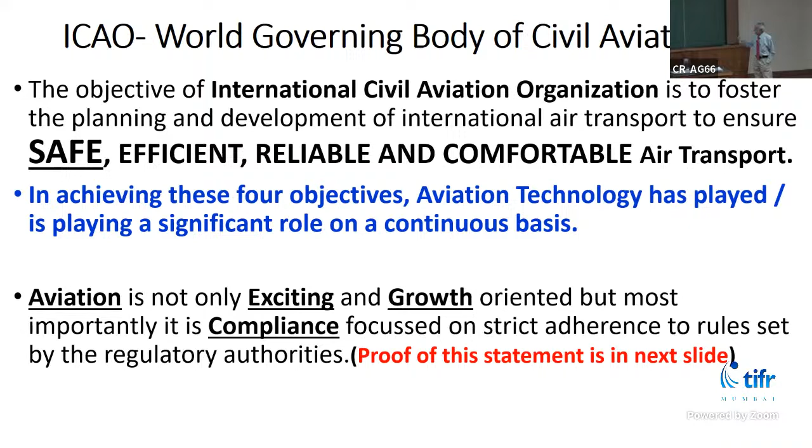When I say aviation is exciting, it is the art or science of flying aircraft, the design, production, and maintenance. For me, aviation means, as I told you, E-C-G.

If you put A as 1, Z as 26, V as 22, I as 9 - if you add aviation, it comes to 91. If you code G as 7, W as 23, growth comes to 91. Thirdly, compliance: C is 3, O is 15, M is 13, you add it, it comes to 91. Therefore I have proved that aviation revolves around these three characteristics, which nobody can deny. I am not a scientist, but I proved it.

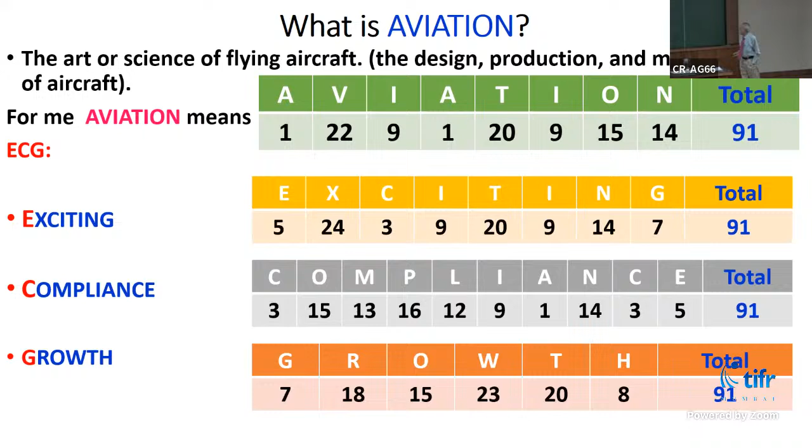Now I will prove practically how this is exciting. The first flight which J.R.D. Tata flew was a Puss Moth aircraft, single engine, registration VT-ADN, from Karachi to Bombay. It landed at Juhu airstrip, carrying hardly 3 passengers, weighing 930 kilograms. This flight took 7 hours from Karachi to Bombay, with two stopovers, one at Ahmedabad and second at Surat.

This flight was refueled by bullock carts at the Ahmedabad airport - two bullock carts by Burma Shell carried the fuel and filled the petrol for this flight. In March 1948, Air India introduced a Lockheed Constellation L-749A.

Its range is about 4,200 kilometers, it carries 51 to 81 passengers, and the takeoff weight is 47,000 kilograms. From 930 kilograms you have come to 47,000.

Then in the 1970s, the 747-200 was introduced, which carries about 400 passengers, and non-stop it can cover 9,500 kilometers, with a max takeoff weight of 350,000 kilograms.

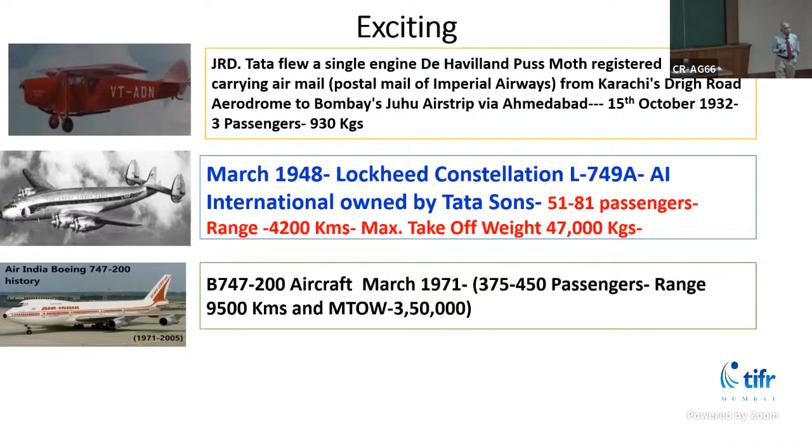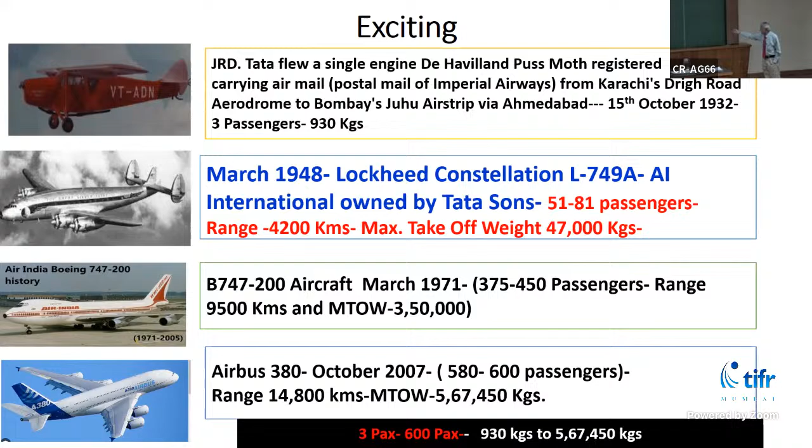The latest Airbus 380, which is supposed to carry the most passengers, 600 passengers, has a max takeoff weight of 567,450 kilograms. This is the exciting growth from 3 passengers to 600 passengers, and today non-stop flights are going on.

This is the first flight cockpit, VT ADN. The same aircraft flew again after the 50th Golden Jubilee, when J.R.D. Tata flew Karachi to Bombay.

Today, the world is looking for this flight, where you will be able to see 2 sunrises. Qantas is going to operate ultra-long flights, with a launch date of mid-2026. This will be the Airbus A350-1000, which can fly 19 to 22 hours non-stop.

That is because of the technology. The technology guarantees fuel efficiency and also safety for operating this flight. If the fuel efficiency is down, the cost of operating is very, very high.

Today, in the airline industry, more than 33% of the cost is fuel. Therefore, if the fuel is not efficiently planned, the cost effectiveness will be very high and no passenger will be able to afford a flight. That's why Concorde died completely, because the cost of Concorde operation is 4 times more than normal jet operation.

Civil aviation is totally regulated compared to road transport. Today on the road, at least 25% of people do not have a driving license, but they will drive. There is no rule. People go in opposite directions, don't wear helmets, and a scooter meant for 2 people will carry 5.

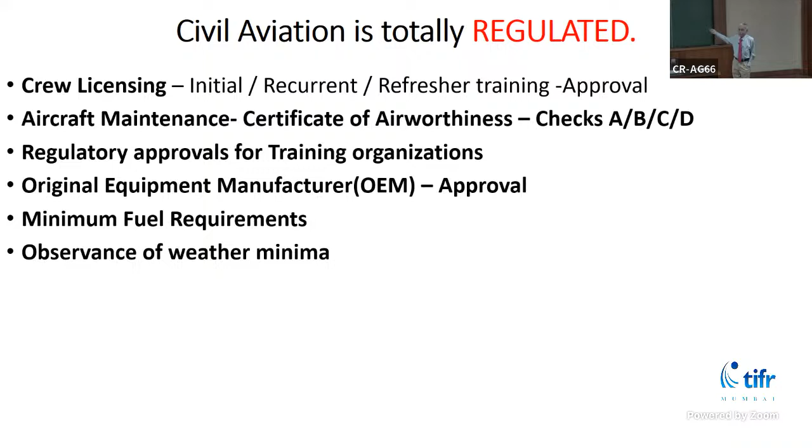Then, what is the minimum fuel that has to be carried on a flight? What are the minima? Supposing a pilot is coming to land, if he is not qualified to do category 2 operation in Delhi, and the weather is below 500 feet with visibility below 500 meters, he cannot land. He has to go on because he has not trained for category 2, which I will explain later. Operations manuals have to be written before a flight starts.

You must have a maintenance manual. These are all the requirements of the regulation. Why I am telling you this is that the entire airport has to be certified, whether it is following international regulations for runway length, stopway, clearway, everything. Because of this, civil aviation is totally regulated and you're enjoying the safety record.

Maintenance check: every aircraft has to undergo an A check, which is every 400 to 600 hours. Did any lorry or bus or taxi undergo a check? It goes on till it grounds on its own. No check. I have seen in India, there is no, what is it...

Glass panel, like a panel, on the right side and left side. People will drive without the glass panel because you don't require a gear. All you require in India is a brake and an accelerator.

In Muscat, when I went for my Muscat license test, I failed on the first day. Why? The road inspector sat in my car and while sitting there, he put the window in closed mode. I started driving and went up to a point, but he failed me because I did not check whether the glass was open or not. That is the level of rigidity expected.

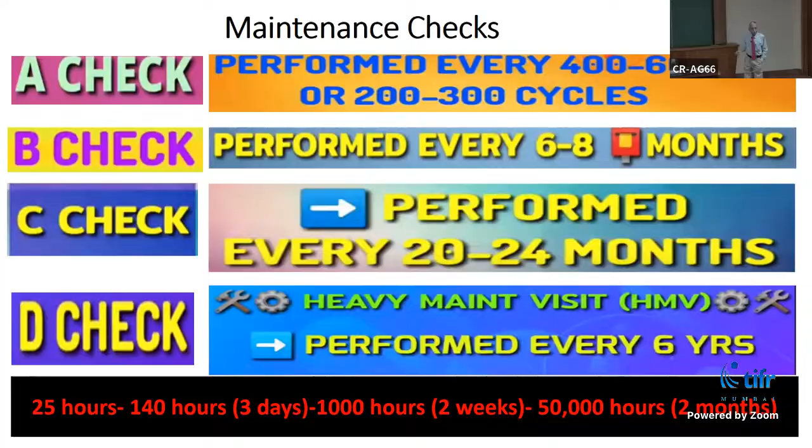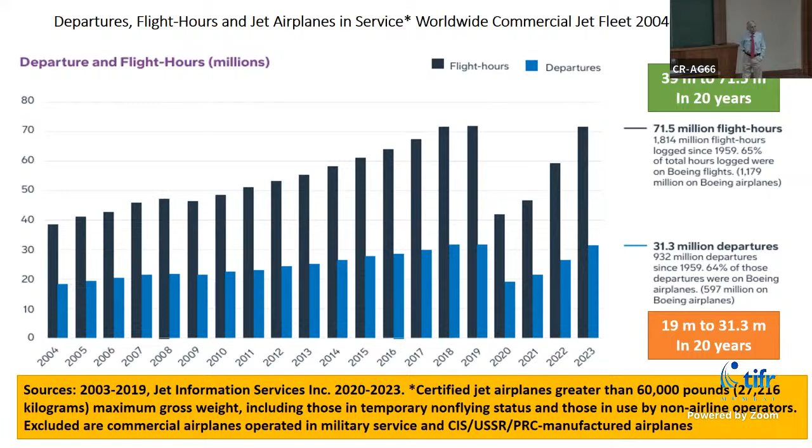This is the growth of civil aviation. Over the last 20 years, flight hours have grown from 39 to 71.5 million, and departures to 31.3 million. If you see 39 million to 71 million, that's almost doubled in 20 years. Similarly, departures grew from 19 million to 31 million - civil aviation is continuously growing. In India, passenger growth went from 103 million to 220 million, almost doubled in 10 years. Airports grew from 74 to 157, almost 3 times, and India is projected to have 350 to 400 airports by 2047.

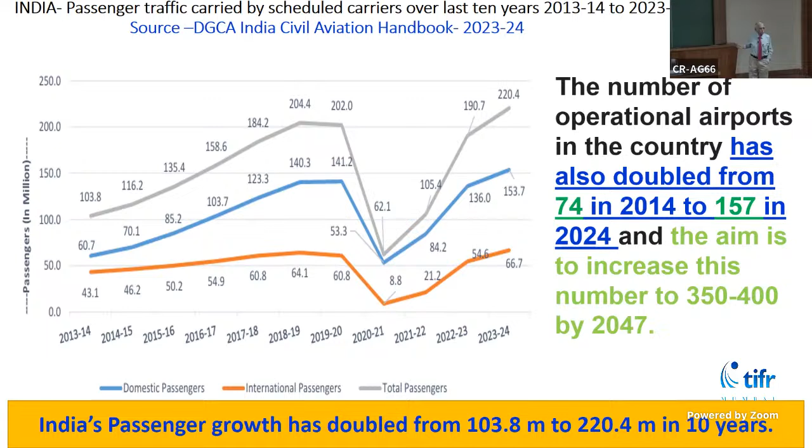Now we are going to see how technology contributed to the 4 objectives of ICAO: safety, efficiency, reliability, and passenger comfort.

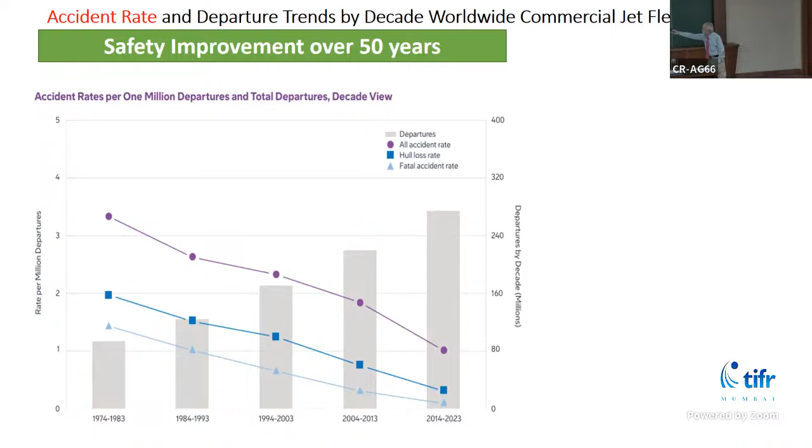Now, taking safety improvements first, if you look at 1974 to 1983, you had almost 3.5 accidents per million departures. It has come down to almost 1. That is the total accident rate.

That is the all accident rate. Next is hull loss - if an aircraft meets with an accident and cannot be repaired, it is completely damaged, a total loss, that is called hull loss. The third curve is fatal accidents. Accident rate has reduced by 45%, hull loss by 58%, and fatal accidents by 68%, even though departures increased by 25%. All accident rates have declined over about 50 years, primarily due to technology.

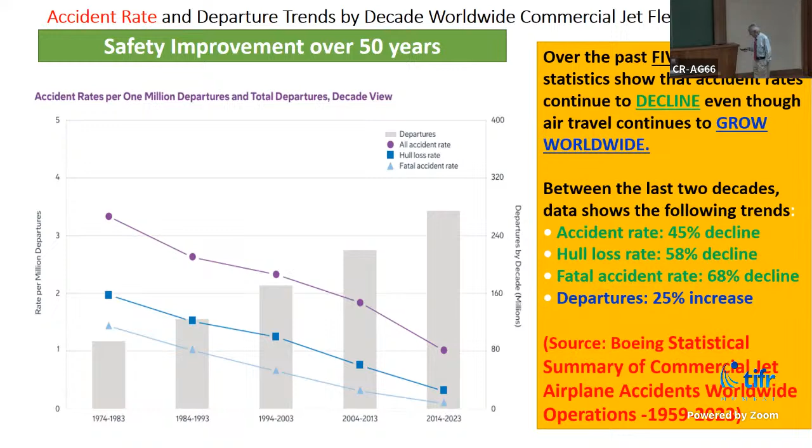This is one example: 40% of the most fatal accidents happen in just 2% of flight time - takeoff and landing are the most critical phases. Therefore, technology has been applied more importantly to prevent landing accidents, like runway excursion and loss of flight control systems, all focused on eliminating or reducing landing accidents as much as possible.

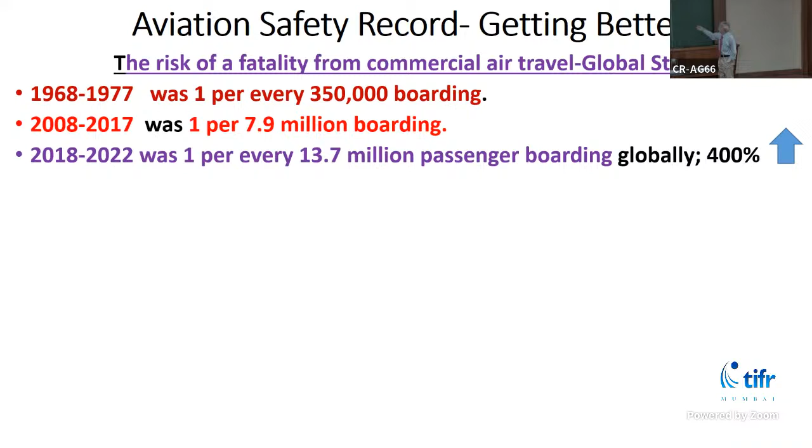In 1968 to 1977, one passenger died out of every 350,000 boardings. In 2008, it was 1 per 7.9 million. That is the safety record. In 2018 to 2022, only 1 death per 13.7 million passengers traveling. Today in Bombay, on the roads, you see 20 deaths every day in each district across India. From 2018 to 2022, with 13.7 million passenger boardings, a 400% increase, the chance of dying during an air journey keeps dropping by about 7% annually, continuing to go down by a factor of 2 every decade - about 2% reduction in accident rate, primarily attributable to technology.

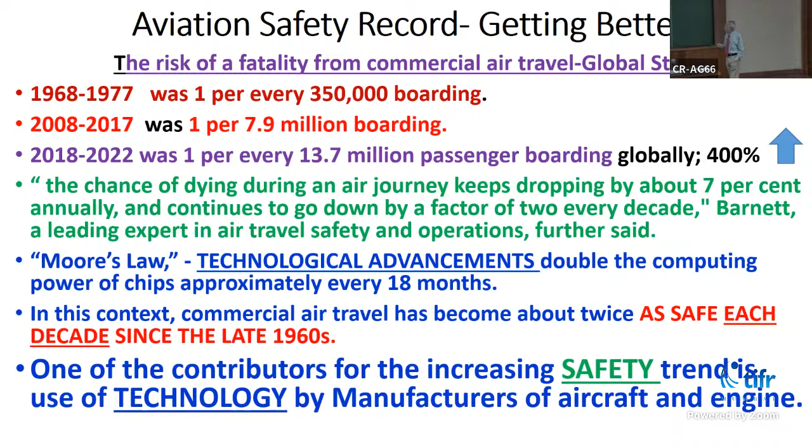Technological advancement has doubled computing power approximately every 18 months. In this context, commercial air travel has become about twice as safe each decade since the late 1960s. One of the contributors to this safety trend is the use of technology by manufacturers of aircraft and engines, which I am going to demonstrate next.

This is the first generation aircraft from 1952, with dials and gauges in the cockpit and early introduction of the auto flight system - the first Caravelle, Boeing 707, 720, and others are generation 1 aircraft. Generation 2 has more integrated auto flight, auto throttle, and autopilot systems, as seen in the Boeing 727, 737, and 747. Third generation starts the glass cockpit.

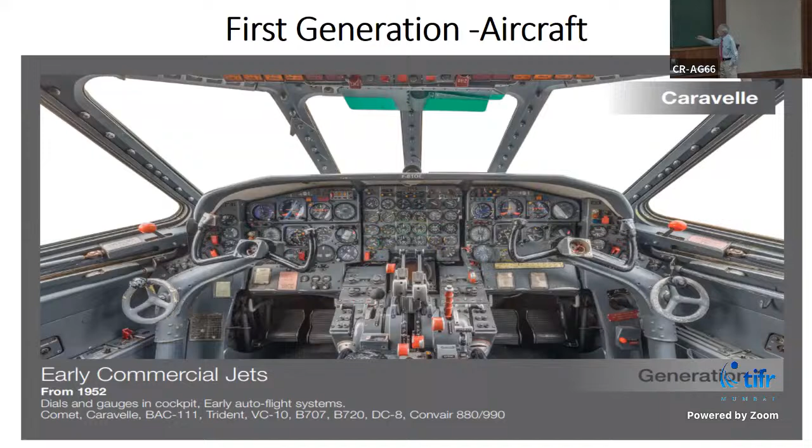That means when the terrain is there, it will give a warning, like in a car also you will have pull up or pull down, and the terrain warning will come to avoid controlled flight into terrain. That is in the generation 3 aircraft.

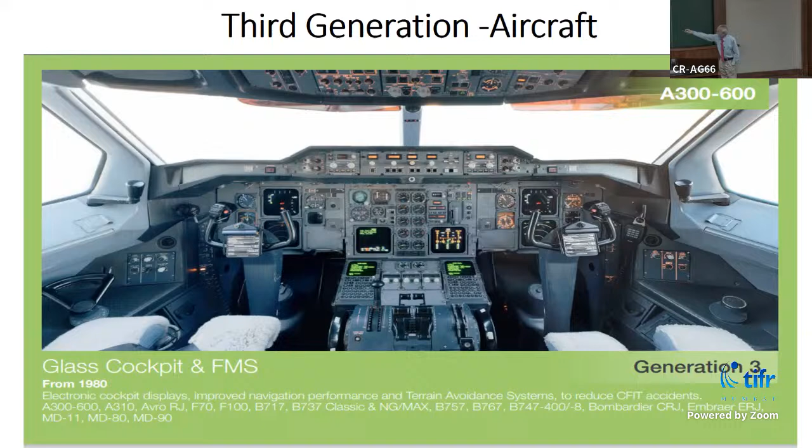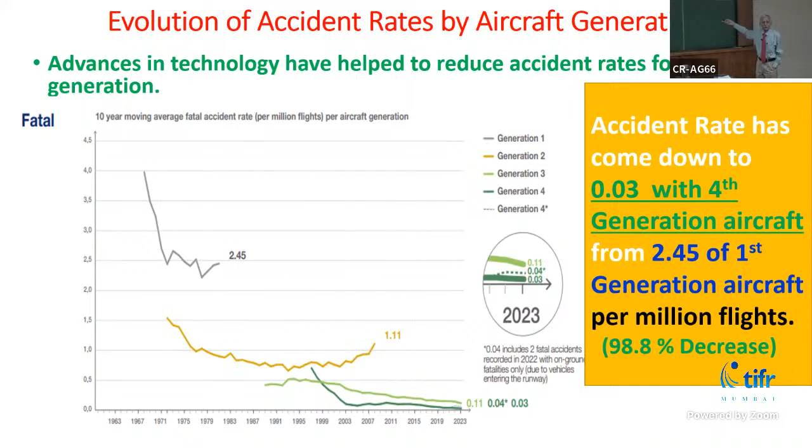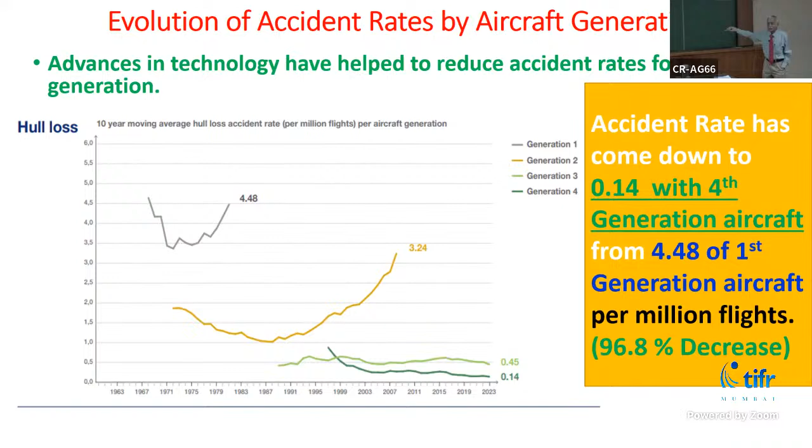Advances in technology have helped. If you see the first generation aircraft, it's 2.45 accidents per million departures. Now it's almost 0, 0.03 - these are Airbus and Boeing slides. If you see the technology progression: second generation 1.11, third generation 0.11, last one 0.03 on fatal accidents. That is why you see almost 100% decrease in accidents comparing generation 1 to generation 4. Same thing with hull loss, 4.48 to 0.14, again 100% decrease because of the generation of aircraft technology.

All three he has shown it. Now the most important thing which you saw is landing and approach, where a lot of accidents are taking place.

If you see here, first generation aircraft, second generation to third generation, 87% reduction in the third. And the third one, loss of control in flight, 90% reduction from generation 3 to generation 4 aircraft. That is a remarkable technological advancement that has enabled aircraft and engine manufacturers to use technology so that flying becomes safer and safer.

This controlled flight into terrain - again I'm showing that same terrain awareness warning system. I will show you one of these, because if I start explaining each system, we conduct a class for each system of 3 hours. Pilot should know what is TCAS, what is terrain, each one we will operate. The ground course goes at least 2 months. Therefore I will not be able to explain everything in detail in 1 hour. I am just telling you controlled flight into terrain has come down practically to zero.

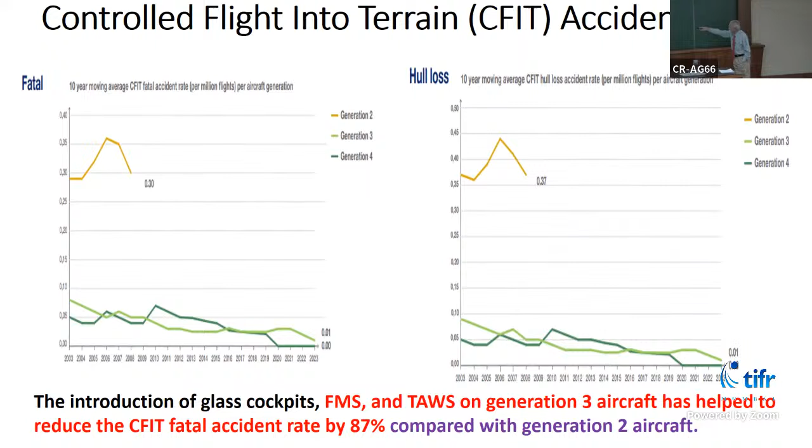It is very glad to know in 2023, there was not a single controlled flight into terrain accident globally. And this is again hull loss - everything has come down. Here, 87% compared to generation 2 aircraft for controlled flight into terrain. Similarly, loss of control in flight, if you take fatal, again it is 90% down. Same thing for hull loss. So I am comparing fatal and hull loss across generation aircraft - third generation, second generation, and first generation aircraft.

This is runway excursion, meaning the pilot is not able to stop the aircraft in time - it goes beyond the runway. Therefore a number of accidents have taken place because of runway excursion. The technology has brought a new thing called longitudinal runway excursions related to aircraft energy management. An improvement in the RE accident rate should be expected with the introduction of runway overrun protection systems.

The Airbus aircraft has already introduced this. This will give a warning to the pilot that the runway is short, to apply the brakes and stop it. Or if exceeding that on a wet runway, it will ask him to decelerate and put the thrust reverser so that he will stop the airplane. The warning will come to him. This is the same thing.

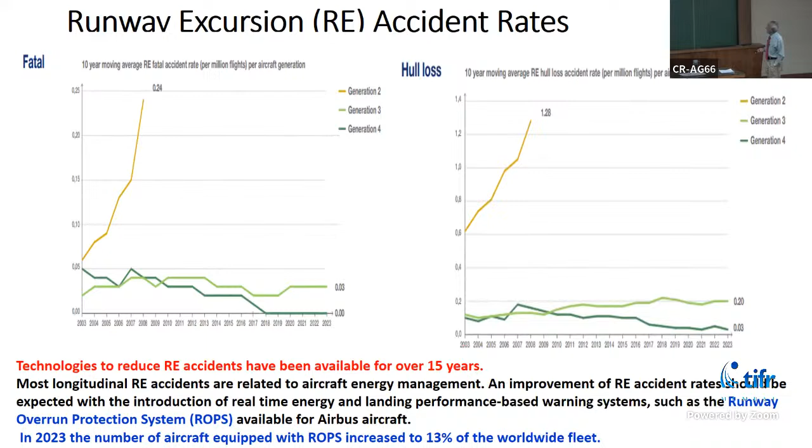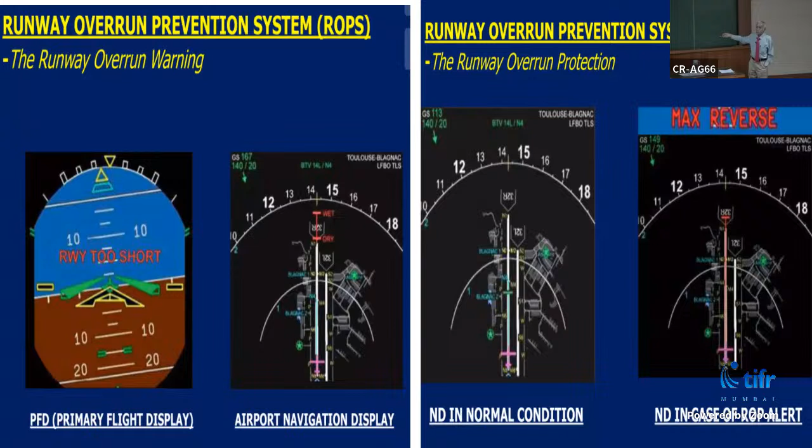I will just show you the picture here. See, the runway overrun system - runway overrun, he will get a 'runway short' warning, that picture will come. And 'max reverse' so that you stop the airplane before it exceeds the runway. At that point there may be some damage, but instead of the aircraft becoming a complete loss, you will be able to save it by stopping with minor damage. Or if he acts immediately, you can fully stop the airplane with minimum damage. These are all the systems available because of technology.

This is the traffic collision avoidance system, which alerts the pilot when the aircraft is coming very close. Mid-air collisions have been avoided a number of times because the pilot is able to get the alert that somebody is coming. The picture shows there are 2 zones. First, the traffic advisory - if it is close to 10 miles, it will give a traffic advisory that some aircraft is coming to you, be aware.

But if he is not able to do so, a resolution advisory will come, which is within 5 miles. He has to act immediately. A warning will come and lights also will come - pull up or pull down, depending upon the situation. This is the zone where an aircraft intruder is coming. At 20 to 48 seconds, that alarm will be there, and at 15 to 35 seconds, the resolution advisory comes.

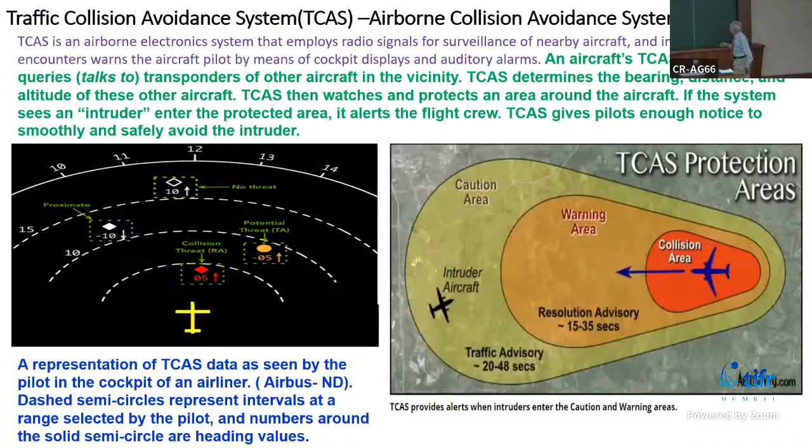The resolution advisory comes, the pilot is in danger. Therefore, he has to immediately take action without questioning whether it is wrong or right, go up or go down, depending upon the instructions he gets in the aural warning. This is the traffic collision avoidance system, developed to completely eliminate mid-air collisions.

This electronic centralized aircraft monitoring system in the cockpit, if any system is malfunctioning, will immediately give a warning. The co-pilot will be able to check what is the reason. He will be monitoring the aeroplane. The other man will be able to check before it becomes a catastrophe. That is available in the A320 family.

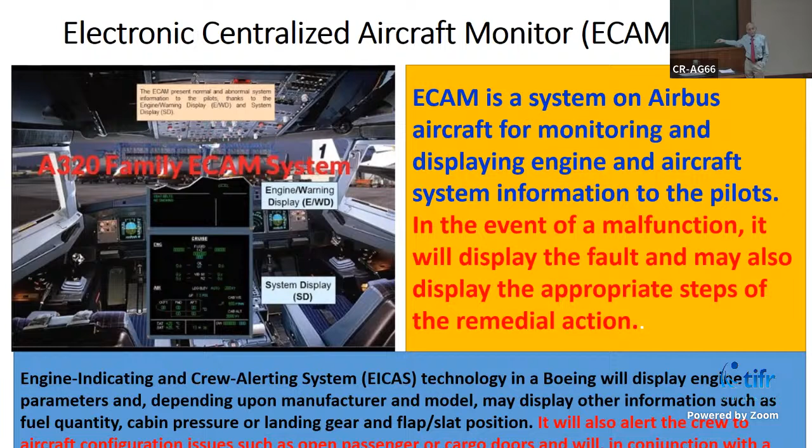Boeing also has a similar system. They call it the engine indicating and crew alerting system. This also alerts the crew when, say, a passenger door or cargo door is opened, a warning light will come. Even if a passenger smokes in the toilet, a smoke warning system will come, and immediately the cabin crew will go and ask them to stop it. Therefore, these warning systems are available in the cockpit.

Now this is the one I just wanted to explain to you: low visibility operation. Now you will see in Delhi, many flights are being diverted below category 2, below category 3. The category 2 operation, the low visibility operation, requires 3 components.

One, the airport should be suitable. The manufacturer, the aircraft, must certify it has all the systems required. Thirdly, the pilot has to be trained. Unless these 3 things are there, you will not be qualified to operate.

Therefore, what does it mean? Say 200 feet means when the pilot comes and lands, at 200 feet he is able to see the runway, he can land. That is called category 1. That means the next level is less than 200, 100 feet.

If he is qualified on category 2, he will be able to come up to 100 feet, then he will see the runway. If qualified on category 3, he can come up to 50 feet, and if he sees the runway at 50 feet, he will land. If he is not able to see, he will divert or go around and wait for some improvement depending upon the fuel. The final decision he will take: if the fuel is not enough for him to go to the alternate, he will immediately take action.

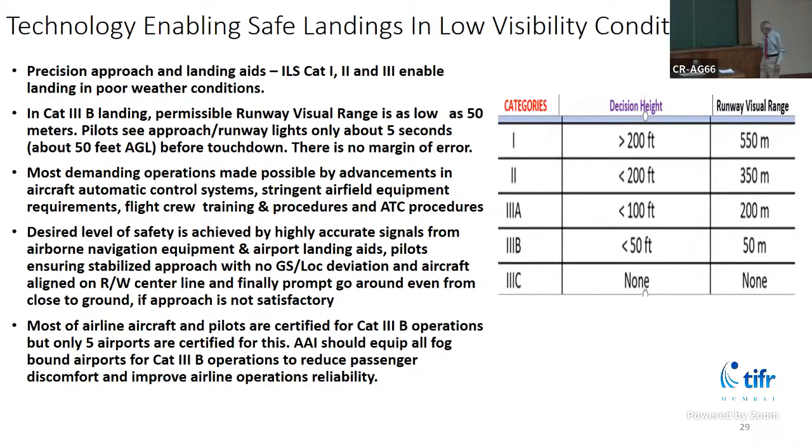200 meters visibility is enough, he can land. If visibility is 50 meters, and a man is qualified on category 3B, he will be able to see only at 50 feet and can still land. Therefore both the pilot and co-pilot have to be qualified on category 2. If one pilot is category 2 and one pilot is category 1, that flight is only considered category 1 - both have to be qualified on board. That's called low visibility operation. In India, there are only 5 airports which have category 3.

When we come to the next one - first goal is safety, that has been contributed. Now we come to efficiency. When planning for efficiency, we have to see the global industry requirement.

In 2009, the entire aviation industry committed to high-level climate action goals. Today, many countries are going to take action - if your carbon emission exceeds certain limits, you have to pay a heavy fine. Similarly, in London Heathrow and other airports, if noise limitation is exceeded - supposing the approved noise is 105 decibels on landing, and a pilot lands with 110 decibels, there will be a mark against them. In Air India, we have paid more than $1 million pounds to the UK for noise violations.

It does happen, but why are they doing it? They don't want noise, because after 11 o'clock the airport itself is closed in Europe. That's why in India flights come 24/7, anybody can land in India. There is no curfew time in India, we are a free democratic country. Majority of the European countries, beyond 11 o'clock, no scheduled flights will come, and if you are a non-scheduled flight, special permission is required.

Therefore, improving the fuel efficiency by 1.5% and achieving net carbon reduction, our carbon emission also should come down. That is the goal: reducing the global net aviation carbon emission by 50%. That is the ICAO goal. By 2050, the present carbon emission should be reduced by 50%. 100% is not possible, so slowly they have set a target of 50%.

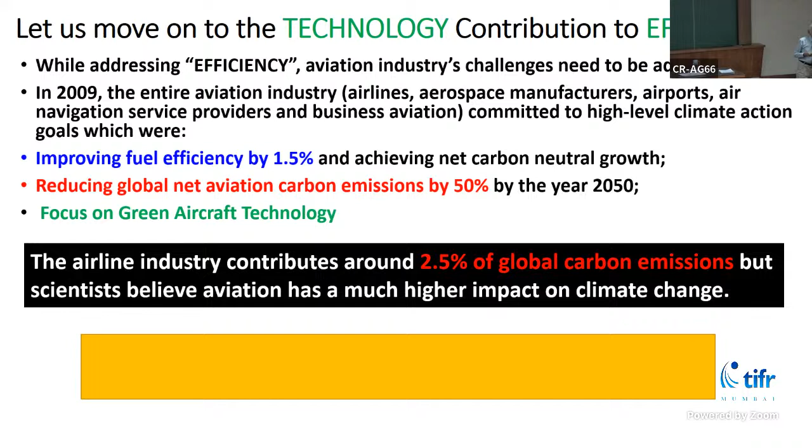I'm not able to. Okay, I will just show you. Next slide, it will come.

Achieving these objectives requires innovation, which can be addressed by technology.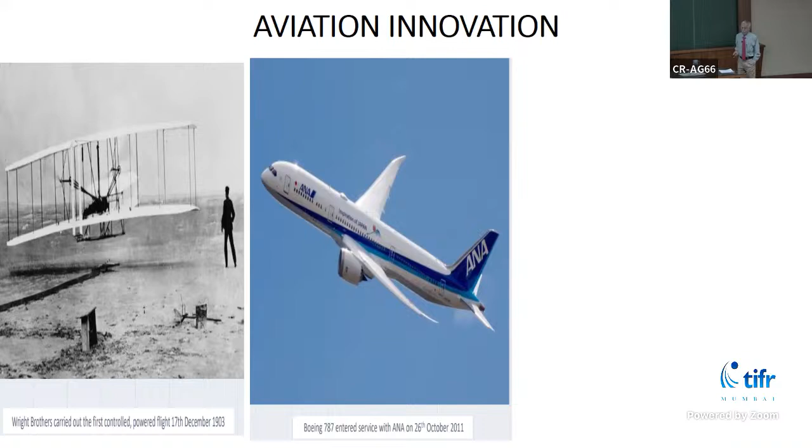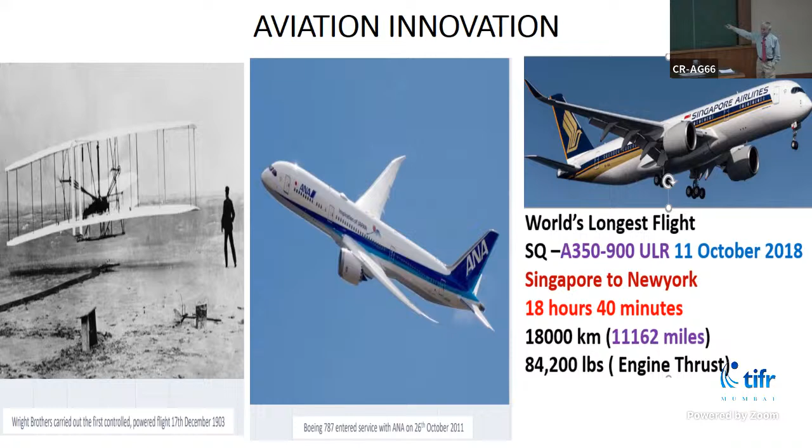This is the first flight of 1903, which was just 120 feet, the Wright brothers flew. This one is the Boeing 787, the current one, 18 hours and 40 minutes - this is the Singapore Airlines flight between Singapore and New York, the current one. The one which I showed was in 2026, it is going to be 19 hours and 22 minutes.

Now, coming back to your point, efficiency upgrades. Manufacturers have already seen that if the aircraft weighs high, the fuel consumption is also high. When fuel consumption is high, emission is also high. Therefore, you have to reduce the fuel consumption, thereby also reducing the carbon. Manufacturers have already made later models of planes efficient with blended wing, leading to reduction in induced drag.

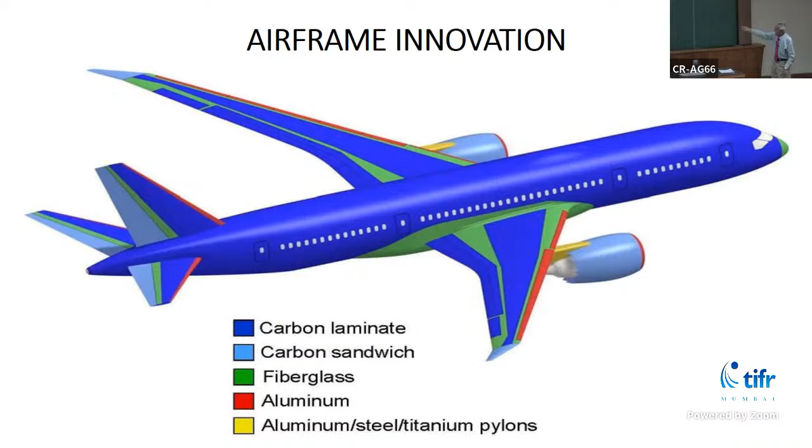If you take the 777-200 from the 1970s, aluminum was 70%; that aluminum has come down to 21%. Carbon was only 7%, it has now become 50%. The carbon fiber reinforced plastics, which are lightweight and have high strength performance, are materials used to achieve larger fan sizes. Structural guide vanes further reduce the weight by integrating the vane and structural components.

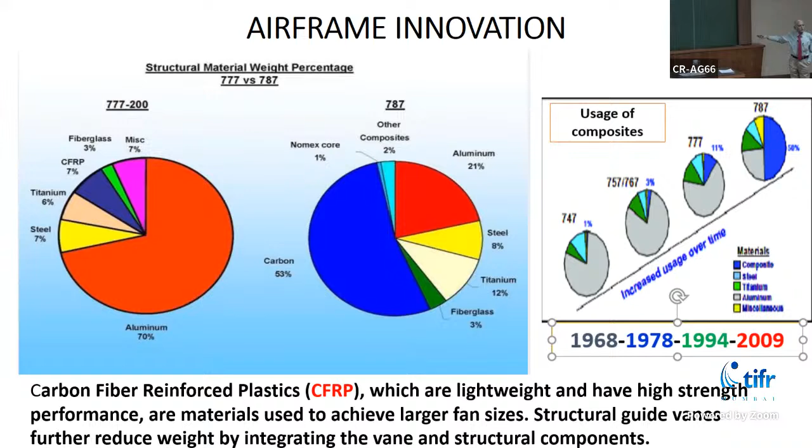As a result, the major change is carbon has increased to 53%. Over a period of time, comparing the 747 used in the 1970s with the 787, you will see the transformation - carbon is almost 50% now, whereas aluminum was almost 70% in the 747. As a result, you are slowly reducing that. The major one is coming, next slide.

Engine manufacturers - CFM, that is CFM International, a French-collaborated Europe, French and American engine manufacturer. They are producing leading edge aviation propulsion which generates 15% less CO2 and up to 15% more fuel efficiency - that is CFM International.

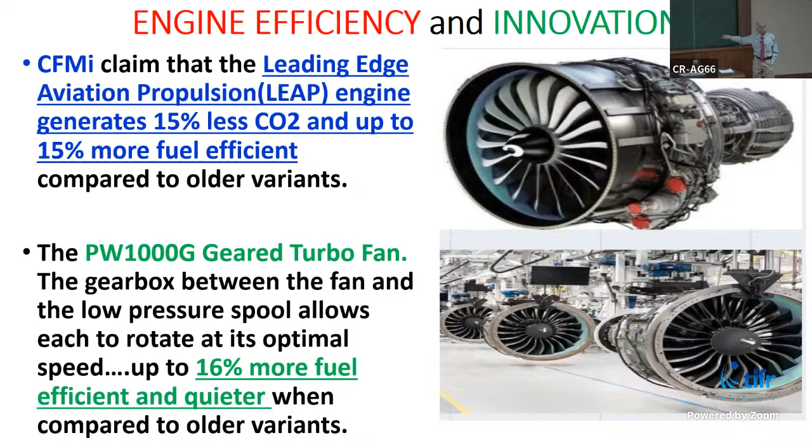Pratt & Whitney is producing the geared turbofan. The gearbox between the fan and the low pressure spool allows each to rotate at its optimal speed, and it will reduce 16% of the fuel and is quieter compared to older variants. The engine manufacturers are also attempting to reduce fuel consumption and increase fuel efficiency.

The third engine manufacturer is Rolls-Royce, who is going to achieve it 100% by using SAF, that is sustainable aviation fuel. That is going to be the future fuel, but it will take time, which I will explain in the next slides. Sustainable aviation fuel is the real thing which can completely eliminate CO2, but it will take a longer time - there is a time limit. Rolls-Royce has a 140-inch fan diameter and geared fan enabling, and claims to offer 25% saving on fuel in each flight.

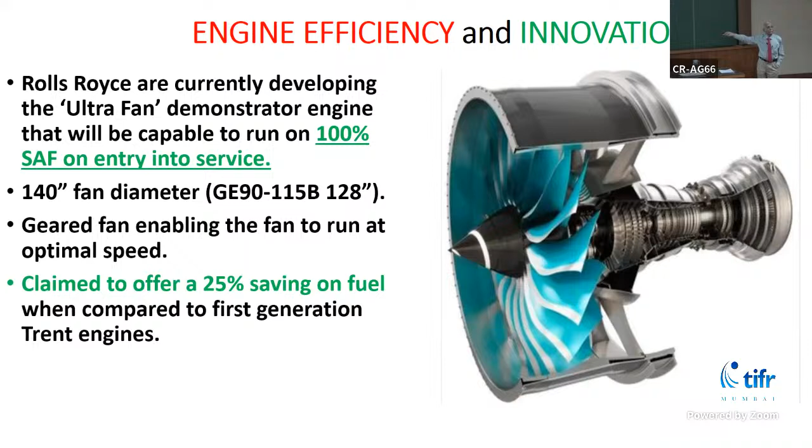This engine, which they are planning, will have completely 25% fuel saving. Lightweight composite fan blades, geared turbofans, composites, extreme high temperature tolerant lightweight materials, improved fuel design, and 3D printing, which I will explain later. 3D printing means three-dimensional design, and you can manufacture whatever parts, but you must have approval for 3D printed parts from the local regulatory authorities. One goal is more efficient engines for the future.

Can you come here in the front, please? Huh? Yes, yes. Yes, yes, yes.

Composite material reduces the weight of the aeroplane. More than about 50% of the weight is reduced if you use it instead of aluminum. As a result, fuel consumption improves if I use composite material, and it is also high performance for the engines.

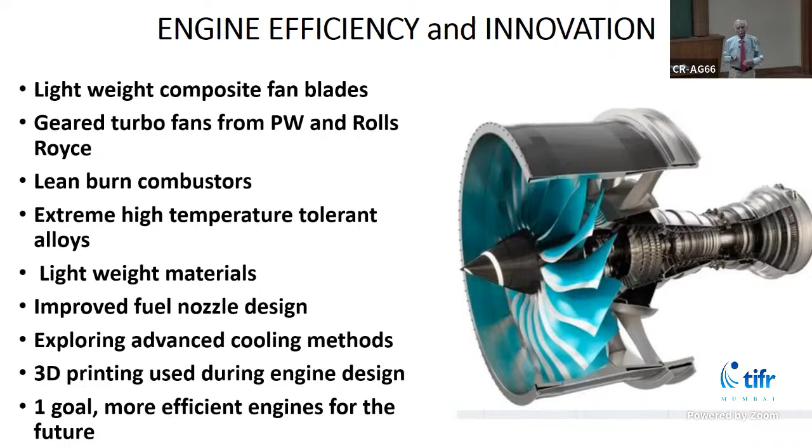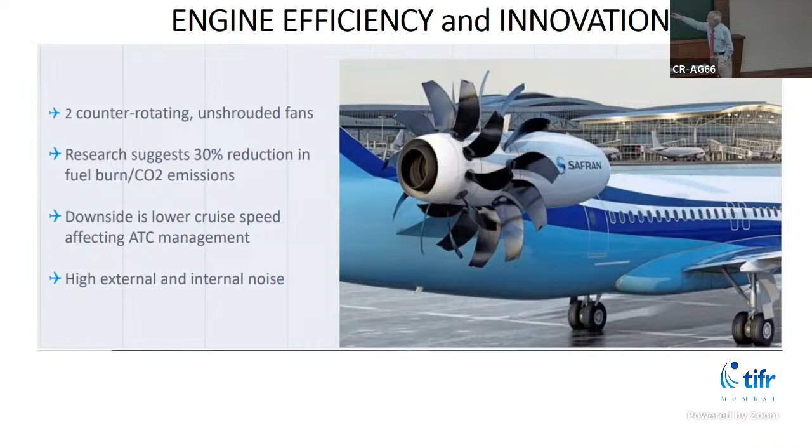This is some of the Safran engine, with 2 counter-rotating unducted fans. Research suggests a 30% reduction in fuel burn and CO2 emissions. The downside is cruise speed is affected; because of the lower cruise speed, ATC management is strained, since the aircraft will be occupying the airspace longer. ATC will have a strain if there's low speed at high altitudes. There's also external and internal noise for this aircraft. Counter-rotating fans have significant improvements in propulsion efficiency, weight savings, and enhanced thrust-to-weight ratio, making them particularly beneficial in the design of efficient, quieter, and powerful aircraft engines.

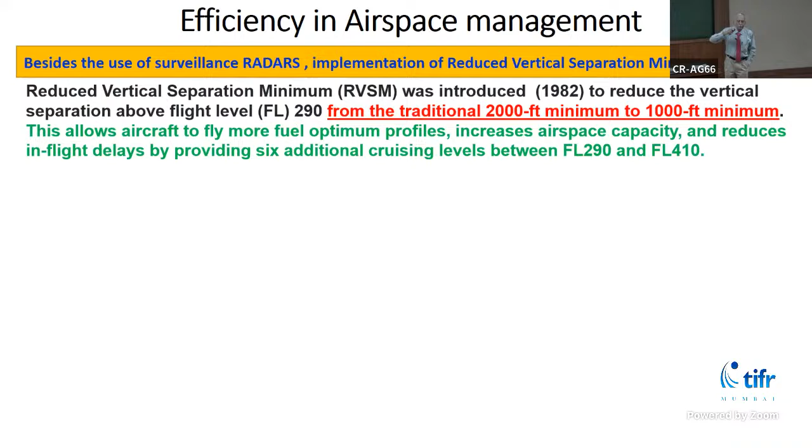Next is radar. This is one of the airspace management topics from earlier, before 1982, when flying vertically, all aircraft had to be separated by 2,000 feet. That was the rule. When I joined Air India in 1966 onwards, they found out the airspace was not available. Because of that, in 1982, they came up with a concept called Reduced Vertical Separation Minimum.

Above 29,000 feet, most jet airplanes globally fly from about 29,000 up to 41,000 feet. Therefore, all RVSM trained crew on RVSM certified aircraft will only need 1,000 feet of separation instead of 2,000. As a result of the RVSM concept and technology, where only 7 aircraft could occupy the airspace before, they were able to provide for 13 aircraft managing the sky at the same time without affecting safety. This is because the crew are trained: if non-compliant with RVSM, they will leave the airspace and maintain the 2,000 feet separation.

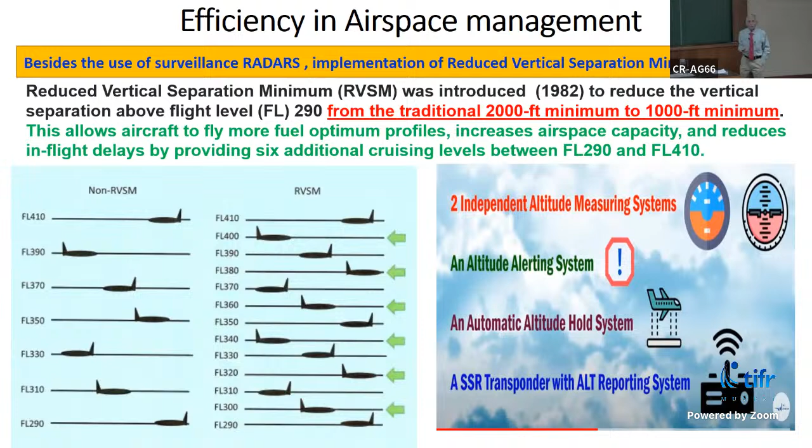That's the standard procedure. Now, these are all the requirements for the aircraft: 2 independent altitude measurement systems, an alerting system, automatic altitude hold system, and SSR transponder. These are the requirements for an RVSM certified aeroplane, each covered under a separate MEL. If any one of these systems is not operating, the aircraft, even though certified for RVSM, cannot operate under RVSM because one of the MEL items is not fulfilled. That's a rigid regulation - the pilot will not operate under RVSM; he will go by the 2,000 feet margin.

Next, we go to reliability. Advanced materials are now primarily being used. Modern aircraft are made of composite materials such as carbon, fiberglass, and metal alloys. These materials help engineers build lighter, stronger, and more durable structures.

One of the technologies - you all heard of the black box. The CVR is the cockpit voice recording system, and the other one is the DFDR, the digital flight data recorder. This continuously monitors, as per regulation, 88 parameters: altitude, speed, and whatever other parameters. These are all analyzed by the software team of the company, and they find out the maintenance areas where this kind of exceedance takes place.

For example, since I come from the operations department, we use rate of climb and rate of descent limits, such as 500 feet per minute. Supposing a pilot has done a rate of climb or descent of 700 or 800 feet per minute, we will analyze and call the pilot. We have analyzed the DFDR readings - most of your flights, your rate of descent is very high, more than the limit set up. They counsel him; they will not use this for any penalizing action, only for counseling.

Similarly, hard landing - if a pilot makes a hard landing, all these things are recorded in the DFDR. Similarly, all the maintenance system sensors and data are analyzed to find out how fatigue affects particular components. Therefore, they will be able to replace those fatigued components through timely analysis of the DFDR data.

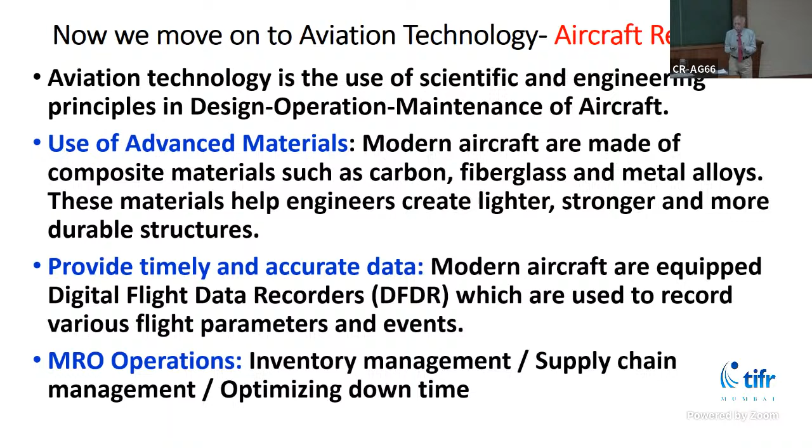This is one of the latest ones, augmented flight training. If you come for the augmented reality training already available in Thakur Institute of Aviation College for maintenance people, it tells you what the snag is and how to repair it.

It automatically gives all this information. Now all of you know this Alexa box, Google. You ask what is the capital of India, it answers. Who is the Prime Minister of India, it answers.

I'm just telling you how. The latest one is ChatGPT. You can do anything. The other day I wanted to write a speech for somebody else. I had no time, so I went to ChatGPT and asked, could you please give a small speech on the subject matter a chief guest has to speak? It immediately gave me about one page. You take 2 minutes to correct it and use it.

Because technology has improved so well, you will be able to get everything. Today nobody goes outside, everything is done with the mobile. If you want to eat something, I want to cook - my daughter says in 2 minutes it will come. By the time I get there, outside the dosa or vada pav or whatever it is will come in 2 minutes. Therefore, technology has made man lazy.

This augmented reality is really an excellent tool for training. It tells what you have to do, and the maintenance technicians embrace this technology because it helps them identify the fault and take immediate corrective action.

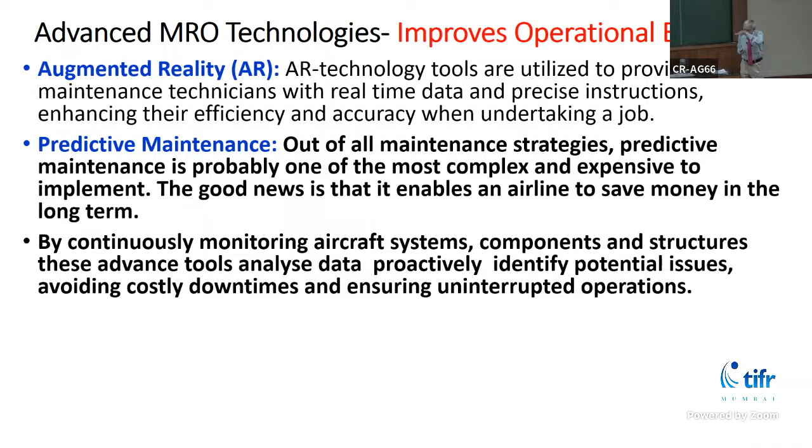Therefore, before the actual fatigue takes place, when the aircraft lands, he immediately makes the repair. So predictive maintenance helps identify in a proactive manner what faults are likely to come.

For example, in Air India, because of this, when a communication system or a particular equipment is not working, it's immediately communicated to the maintenance from New York to Bombay. As soon as it's in Bombay, the ground time is 2 hours for the aircraft to go for the next flight.

Within the 2 hours, because he's already got all the information through the ACARS system or the maintenance system, he will be able to keep everything ready. The moment the aircraft comes, normally if that information is not available, it will take 4 hours. Therefore, he will be able to complete it in 2 hours.

By continuously monitoring the aircraft system, component structures proactively, downtime is reduced, ensuring uninterrupted operations.

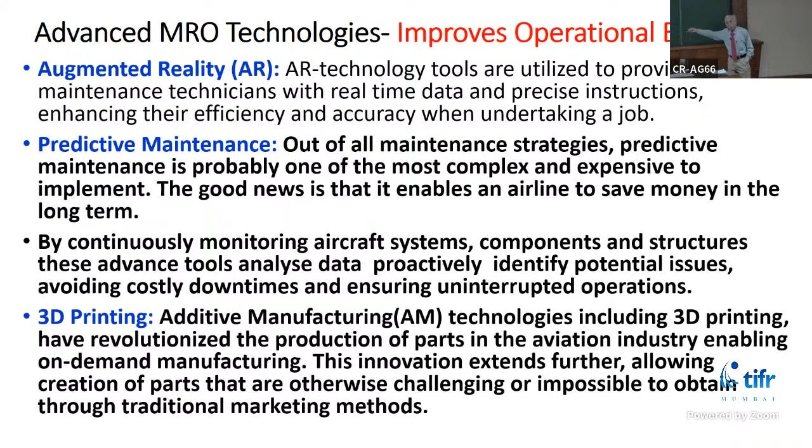This is 3D printing, as I told you - additive manufacturing technology, including 3D printing, has revolutionized the production of parts in aviation. The majority of parts you can do on a 3D printer as per the approval of the DGCA - not all of them are approved. I will show you in the final slide which parts are approved for 3D printing, so that you don't have to wait for the manufacturers to send it, which will take a longer time. Therefore, you will be able to use 3D printing technology to save a lot of time and cost.

Passenger comfort, I don't have to tell you - today you just walk in with a mobile right up to the aircraft. Web check-in, electronic boarding card, biometrics. In Abu Dhabi, you just stand there, no passport even seen, everything is done on smart travel technology. And secondly, in-flight entertainment, internet, everything is available.

And this is 5-star luxury. There's nothing to do with technology, but aircraft have become so technology-focused.

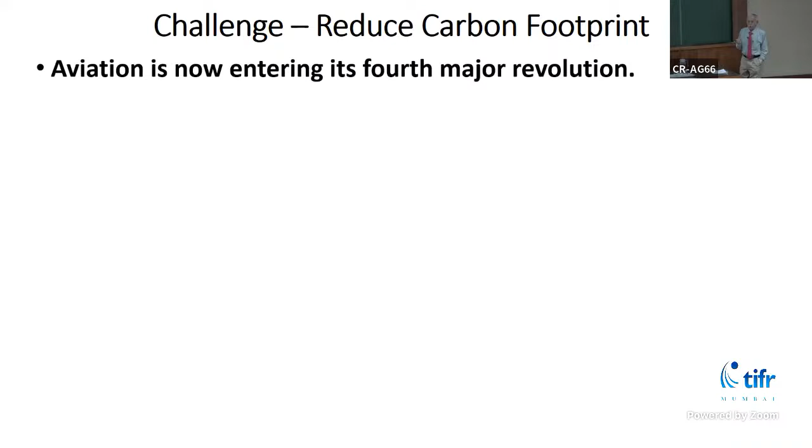Today, the 4th revolution centers on sustainability, representing a fundamental change in how the aerospace industry operates. In addition to CO2 emissions, the sector is tackling contrails, which I will explain in the next slide - this occurs only when you fly in humid regions, where you get water crystals, which is called contrails.

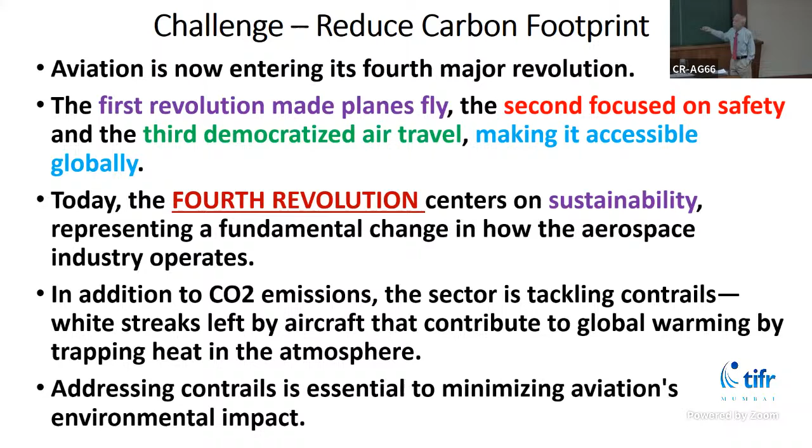Using weather data, you will be able to predict the humid regions so that pilots can avoid them.

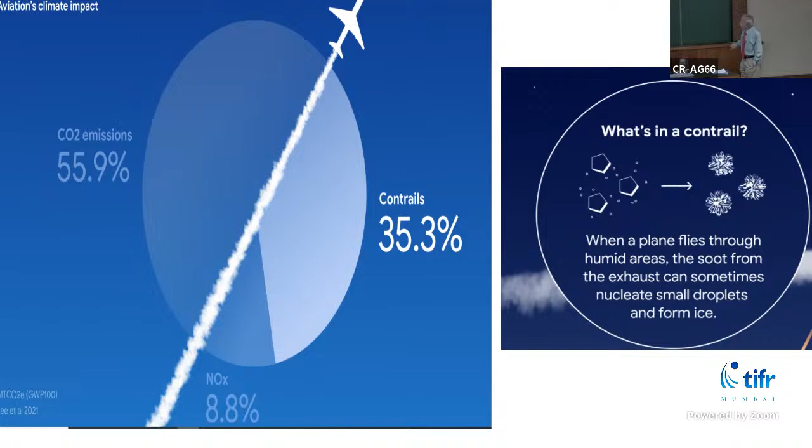What is a contrail? When a plane flies through a humid area, the exhaust can sometimes nucleate small ice droplets. This is called a contrail. In terms of environmental impact, 55.9% is carbon, 35.3% is contrails, and nitrogen is 8.8%.

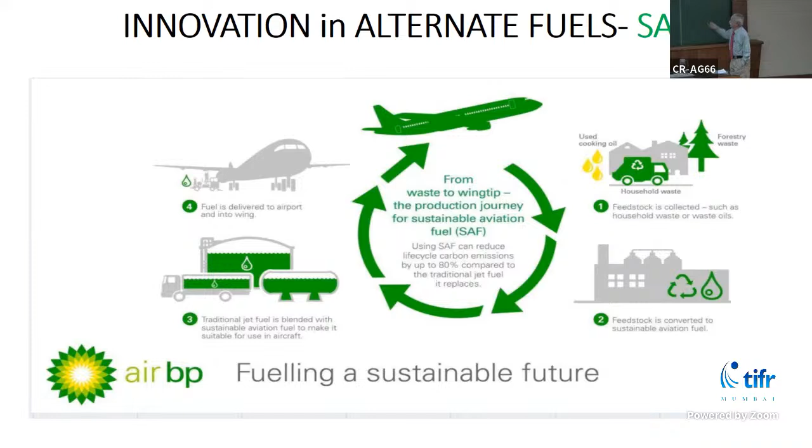Coming back to sustainable aviation fuel, this is the future fuel. There is no way the current aviation fuel will stop in 20 or 30 years, but this is the ultimate goal. What they do is take used cooking oil and forestry waste as feedstock, collect it, convert it into sustainable fuel, and then put it into the jet fuel tank. That is what they do.

Sustainable feedstock such as field corn is grown on farms. Other feedstocks are collected, such as used cooking oil, animal fat waste, and certain household waste that would normally end up in a landfill. The feedstock is processed to remove impurities, and that is used to produce ethanol, which is then processed into a product chemically identical to aviation fuel.

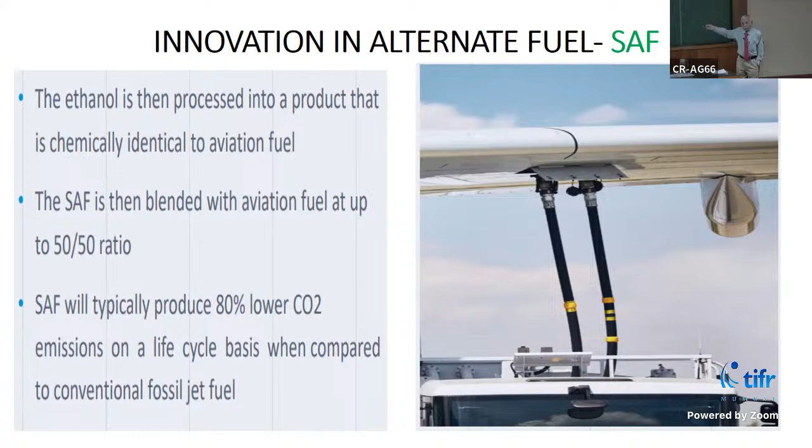The sustainable aviation fuel is blended into aviation fuel at 50/50 - they are planning 50/50, not 100%. One difficulty is that the cost is prohibitive, but even so, it will produce an 80% lower CO2 life cycle, which will definitely achieve the fuel emission goals.

But what are the problems? Normal fuel is $2.10 per gallon; now it's 4 times more, and there isn't enough being manufactured. Therefore, this will be addressed by aviation industry stakeholders - how to make sustainable fuel available and affordable. Those are the two elements needed to achieve SAF.

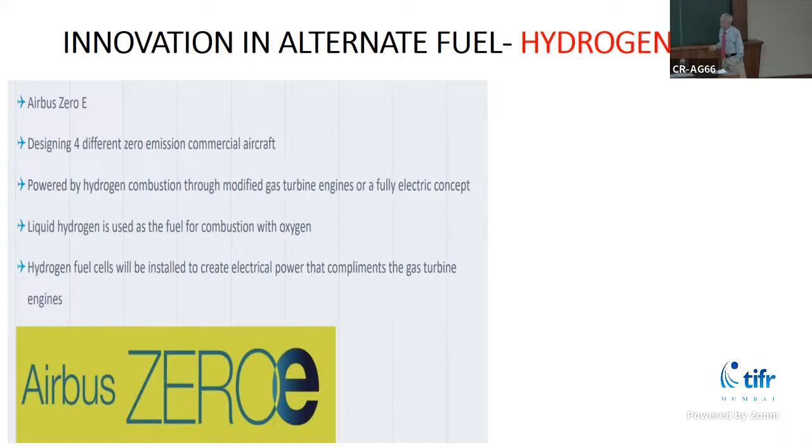Now, alternation - Airbus is already planning alternate fuel, meaning they will go to zero emission with hydrogen. Hydrogen fuel cells will be installed to create electrical power that complements the gas turbine. This is the Airbus goal, planned for 2035.

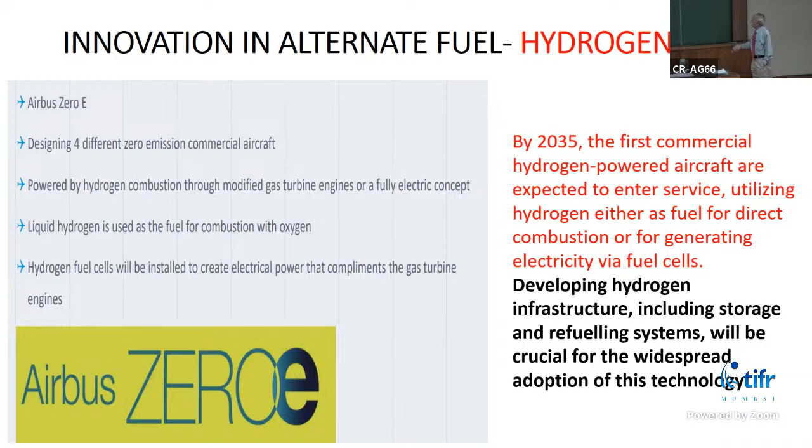Airbus is planning to develop this and put it into service - that's about 11 more years away. Also hydrogen, and some other electric options. The next one is electric: a multi-electric motor turboprop with a range of 1,000 miles carrying 100 passengers is also being planned.

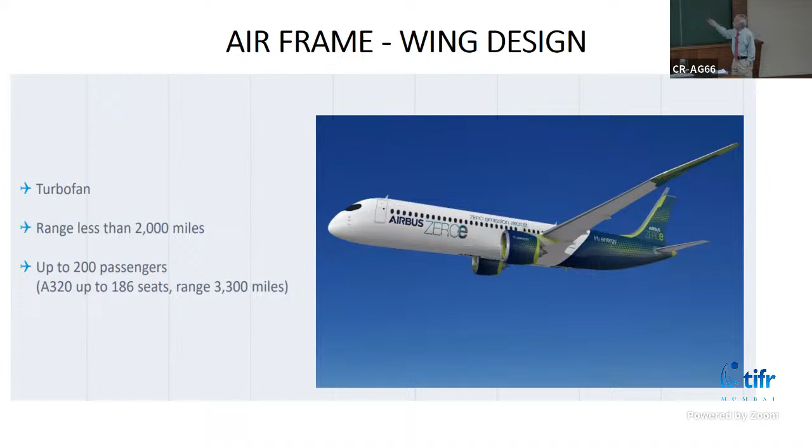Similarly, a turbofan with 2,000 mile range is also under development, with Airbus already working on the wing design. India is also in the plan.

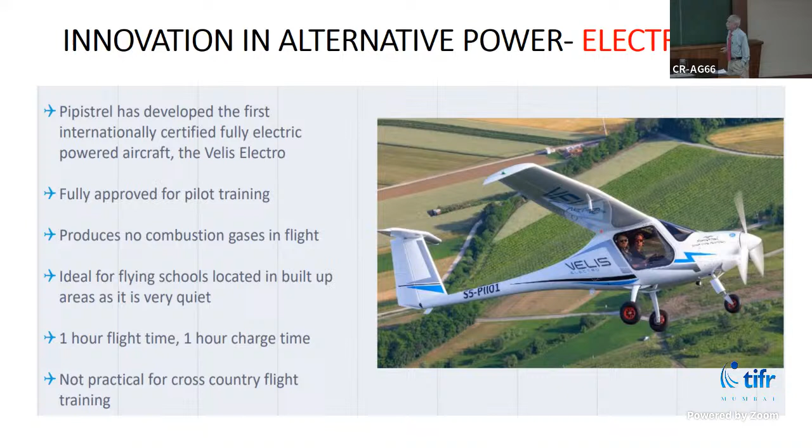Pipistrel has developed the first internationally certified fully electric powered aircraft. Right now it can fly for 1 hour but cannot be used for cross country flights - it has to operate on a controlled flight only. It can only be used for pilot training in 1 to 2 hour durations, and this aircraft has been approved by the American FAA for training flights.

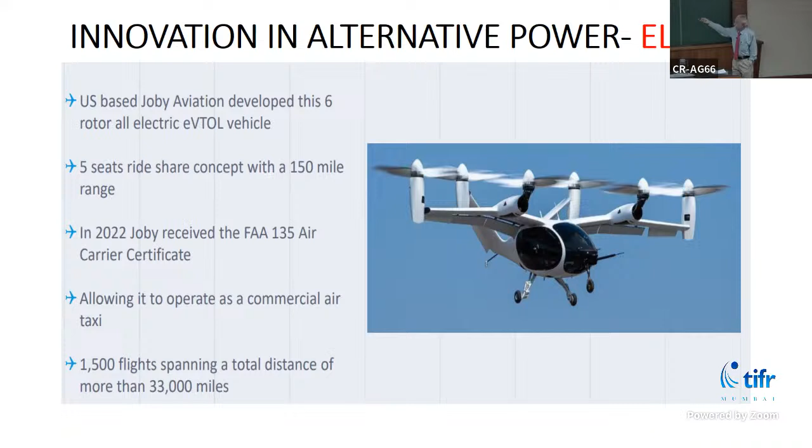The second one is US-based Joby Aviation, which developed a 6-rotor all-electric vertical takeoff and landing aircraft. It was certified in 2022, and they have already operated 1,500 flights, accumulating more than 33,000 miles. In the US, it can carry about 5 passengers with a range of 150 miles.

Now, Sarla Aviation in Bangalore is already on the job with a 7-seat vehicle with a range of up to 160 kilometers. Bangalore Airport and Sarla Aviation are already planning this. It will take 3 years because the regulatory approval has not yet come - to attain approval and complete testing, this aircraft will take at least 3 years after getting the DGCA approval.

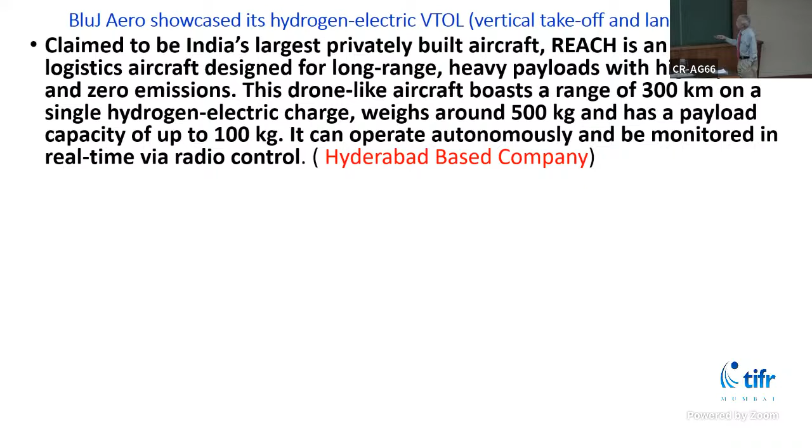This is a Hyderabad-based company - BluJ Aero showed a hydrogen electric vertical takeoff and landing aircraft. The range is 300 kilometers, the weight is 500 kg, and the payload is 100 kg, carrying maybe 2 to 3 passengers.

This is BluJ Aero. They are planning their first hydrogen cargo flights in 2026, after which they anticipate flights carrying 3 to 4 passengers by 2030. Right now, in 2026, they are testing with cargo.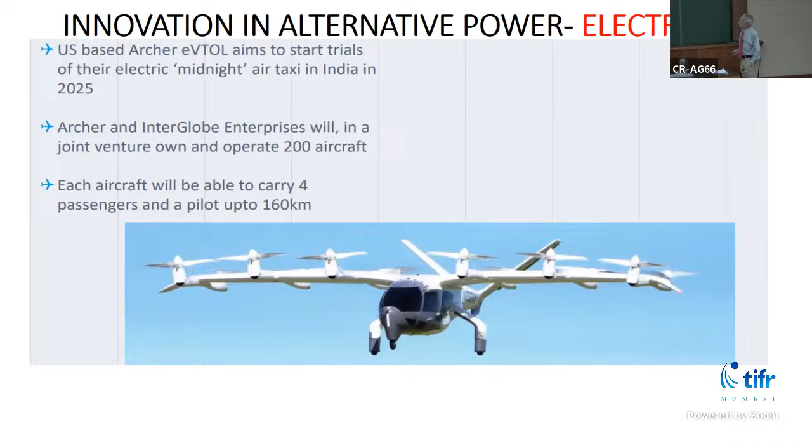Next, moving on to technical topics - what are the technology trends? This is one of the things which is going to revolutionize aviation: artificial intelligence, which everyone knows. Second is autonomous aircraft. Third is 3D printing, which I will show you. Biometrics has already been implemented, and last is virtual reality training, which is on the way.

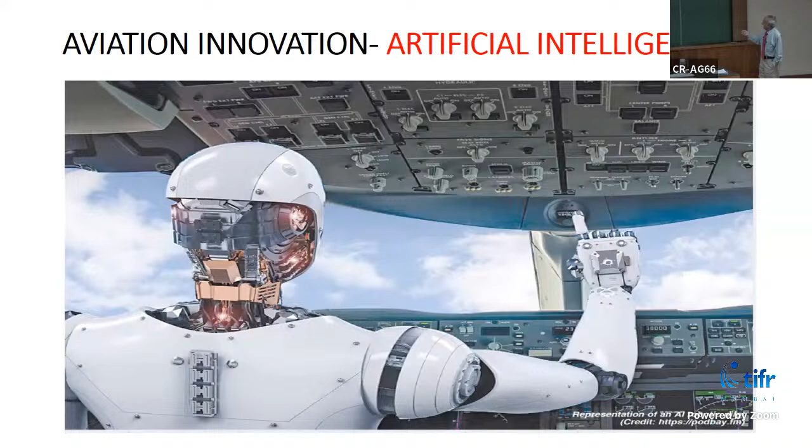Artificial intelligence allows computers to learn and solve problems almost like a person, because it answers everything.

Artificial intelligence and machine learning algorithms are revolutionizing aviation, impacting everything from flight planning and scheduling to aviation maintenance. Because of the data available - wind conditions prevailing, turbulence areas - artificial intelligence can provide data based on which the flight dispatcher on the ground will be able to select an optimum flight route, so the pilot saves flight time and fuel.

Artificial intelligence powered systems bolster safety and situational awareness, analyzing vast amounts of data into actionable intelligence. Pilots and air traffic controllers benefit greatly from this in air traffic management. This transformation not only enhances operational efficiency but also elevates overall safety.

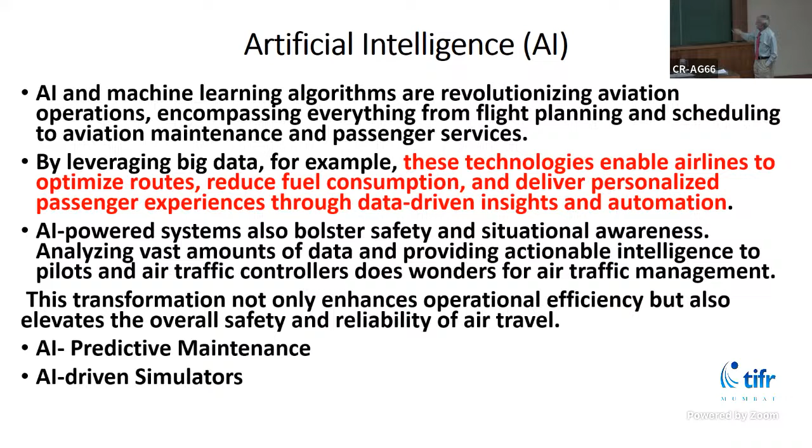These are all the things - smartphones, which we are already seeing, and ChatGPT, which already came out in 2022.

Tesla autopilot has already started self-driving vehicles, and Waymo is the new one - fully autonomous since early 2022, with their fleet rolled over to fully electric. These are all examples of that.

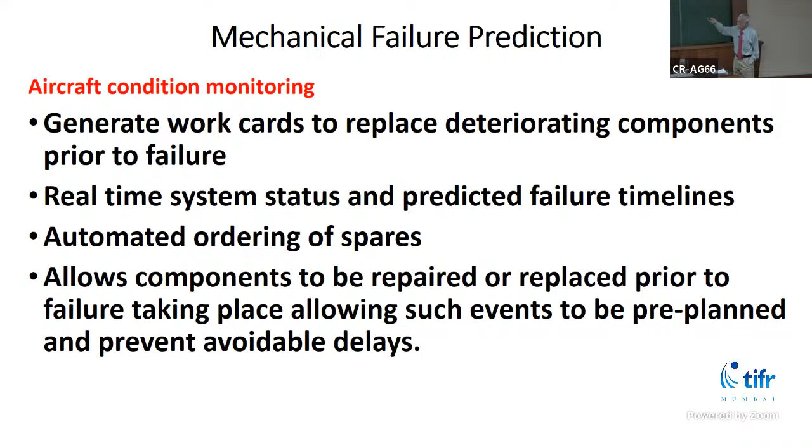Aircraft condition monitoring - artificial intelligence will be able to generate work cards for parts which are deteriorating over time. Automatically, it will tell maintenance people to create a new work card to repair this. Similarly, it will automatically order spares that are running low, because it's continuously monitoring the spare supply.

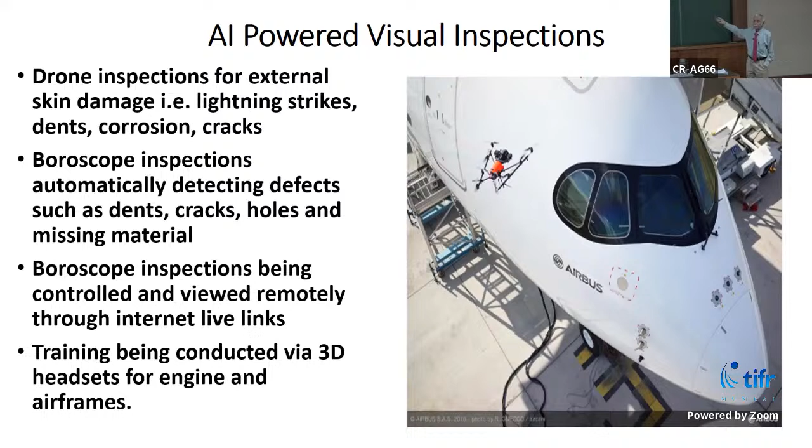Visual inspection can also be done - boroscopic inspection and visual inspection. If you see here, you'll be able to see the drone. Any minute crack can be identified using artificial intelligence powered visual inspection.

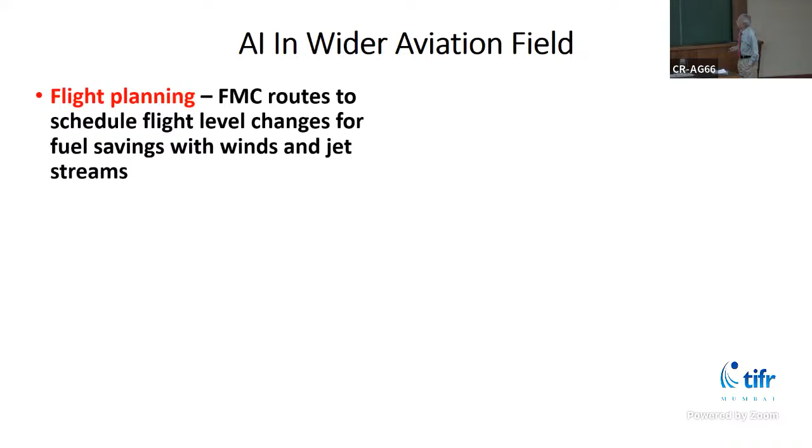This is Air India's one - flight planning, customer service, airport management, artificial intelligence in the airline industry.

This is the future possibility - reduced or completely pilot-free operation. Here I want to tell you one thing: when I joined in 1966, Air India had 5 men in the cockpit - commander, co-pilot, flight engineer, navigator, and on the Moscow sector, a radio operator.

FRTO - in 1970, when the 747 came, the navigator was removed because the inertial navigation system came in. In 1980, when the Airbus flight management system came, the flight engineer was removed. Finally it became a 2-man aircraft.

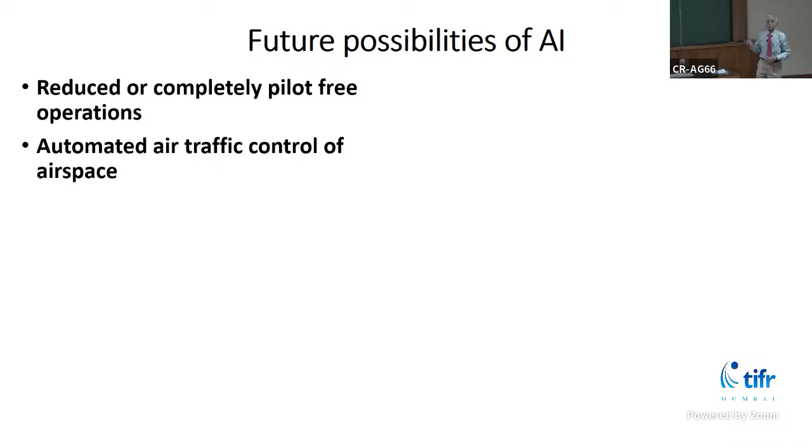But with my experience, I can tell you no passenger will travel on any commercial aircraft if a pilot is not in the cockpit. You can say anything - that is my philosophy.

And still I'm going to say one more thing: 2 pilots will always be there, because one person today may not be able to handle it - long flights of 18 or 19 hours, something happens, you will not be able to control it alone. Therefore, though they are telling us pilotless aeroplanes will come, I do not know - I'm 83, I may not be able to see it, but you will all be able to see it. Definitely commercial aircraft will continue to have one commander and one co-pilot. Maximum they may do one pilot - I do not know, we'll see.

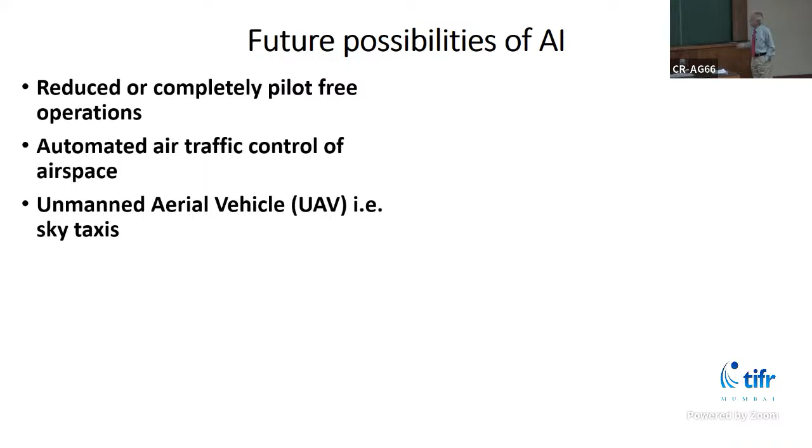Robotic ground handling - all these are future possibilities for airports. Tomorrow, unmanned cargo aircraft - these are all being certified by the European Civil Aviation authority.

The pros and cons: artificial intelligence has cost saving potential, continuous improvement, increased efficiencies. But poor data leads to problems - most importantly, potential cyber security risk and potential for sabotage of the data.

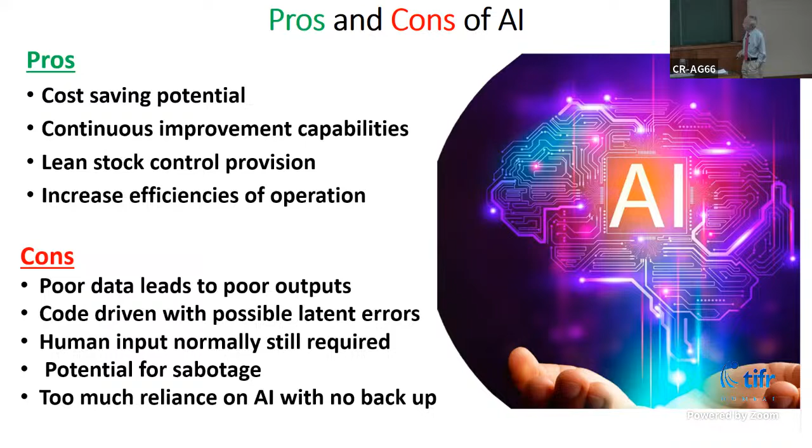Therefore these are the consequences - too much reliance on artificial intelligence with no backup is not a good thing. Artificial intelligence is also not immune to unplanned events. You will have this only - you can't help it.

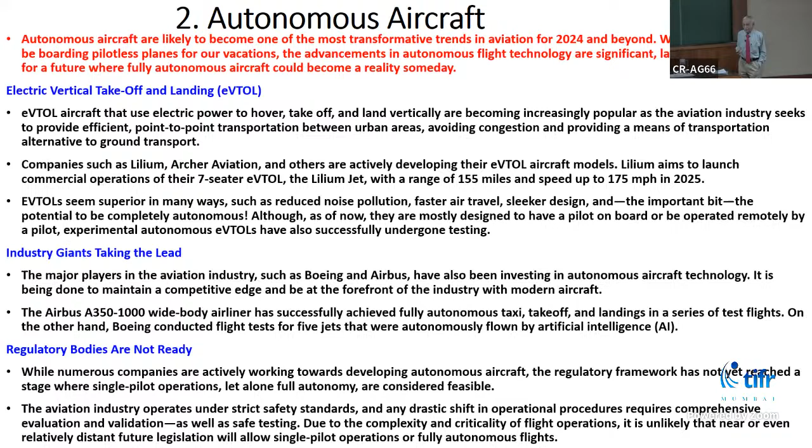Autonomous aircraft is already there, as I told you. The most important thing with autonomous aircraft is that regulatory approval will take a longer time. It's not easy to get. The industry has to work to convince regulatory authorities that autonomous aircraft will not dilute safety. Until then, it will take longer, and more test flights are required.

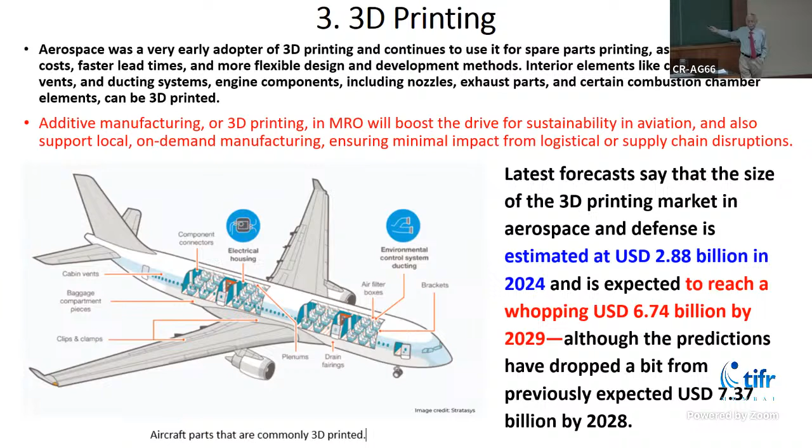Less weight, and it's easy to functionally integrate. Production planning schedules for arranging aircraft schedules and maintenance checks will be easier. Industry-compliant materials will only be used, giving lower CO2 emissions and significant cost reduction because of 3D printing.

Biometrics I've already covered. This virtual reality training is on the move, and for the majority, pilot simulators are going to be used, with full flight simulators for pilot training.

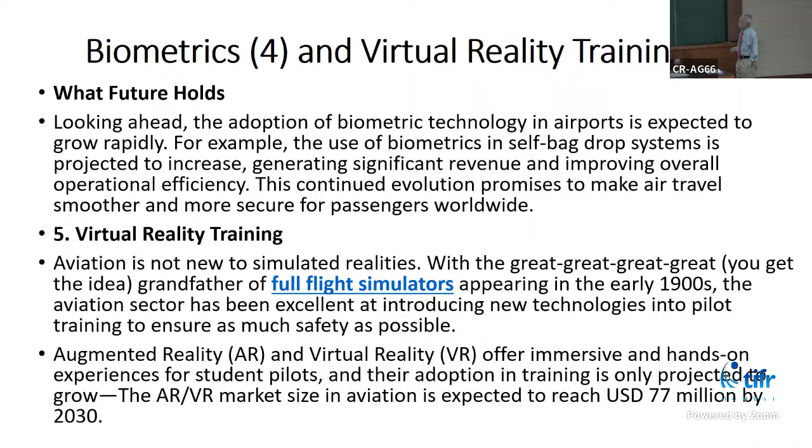Better ramp handling and more efficient assembling process, enhanced communication, convenient data access, and faster wiring—these are all the advantages of that.

Future challenges: regulatory authorities will need to work, as the ultimate goal is to increase efficiency. Sustainable aviation fuel has limitations due to availability and cost, as I told you. New engine technology is also increasing cost. Innovation in wing design will require significant airport infrastructure changes. That's very important. End-of-life issues remain for carbon and battery technologies—when you have an electric aircraft with batteries, battery technology has to be completely improved, and all airports must be fully equipped to provide battery charging.

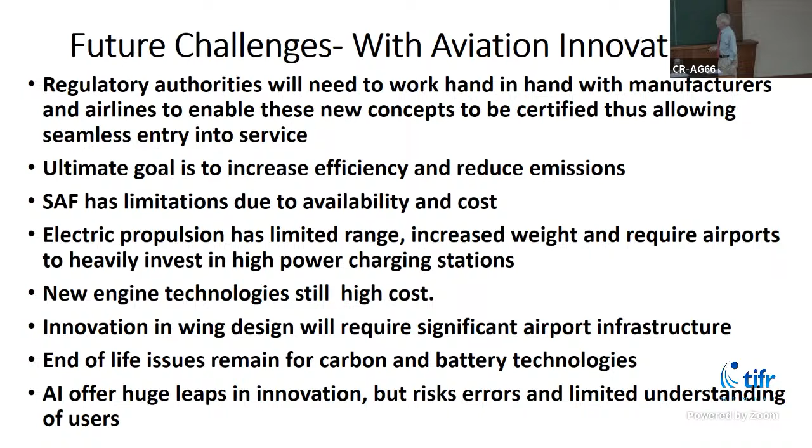Artificial intelligence offers huge leaps in innovation, and we need a TFIR for aviation safety and efficiency—that is technology, focus and innovation, and finally, the resources required.

This is the final summary. Because of time constraints, otherwise I would have covered more. Any questions? I'm prepared to answer, since I wanted 10-15 minutes for that.

No, not at all. Thank you very much for a wonderful lecture, sir. Yeah, thank you, sir, for the wonderful presentation.

I just want to know, as we were seeing that navigation is getting more and more satellite-based—a few months ago I saw a video where an aircraft was flying at 30,000 feet and suddenly the GPS signal got spoofed, and they got an EGPWS warning, an enhanced ground proximity warning saying terrain, pull up. But the aircraft was at 30,000 feet, so obviously there was no terrain there.

But if this kind of spoofing happens at a much lower altitude, what is the problem? And the second question is, if the terrain database for all the airports along a route is available in the computer—say from Bombay to London, all the terrains throughout the route are available in my database—when I'm actually approaching to land or diverting at that point, or, say, operating from Delhi to Tashkent over the Himalayas and Kabul, the safety height of the flight depends on the terrain.